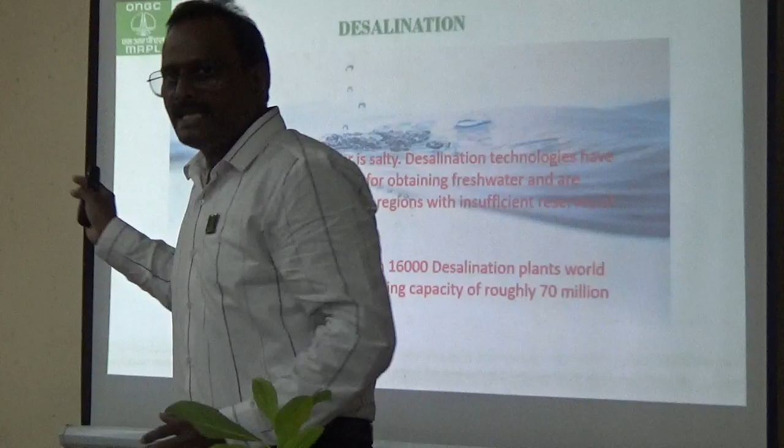Coming to this, 97% of the water throughout the globe is saline, salty water. So definitely, whatever freshwater resources we have are only 3 to 4%, that's it. The remaining, around 97%, is what we have throughout the globe. So what is the next alternative?

Up to now our eminent speakers have spoken many things, and I really learned a lot today from them. Earlier we were going with nature, but now due to urbanization and many other things, there is a small deviation from nature. So whatever freshwater resources we have may not be sufficient for our sustenance. That is the reason.

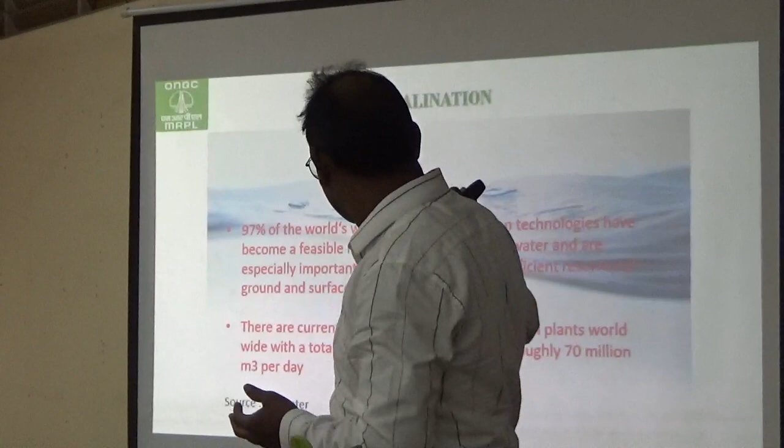Currently, throughout the globe, there are 16,000 desalination plants, really producing 70 million cubic meters per day. 1 cubic meter, as sir already said, is around 1000 liters. So this much saline water we are converting into fresh water for various purposes.

First of all, the source is raw water. The raw water sources are, one, sea water, and the other, brackish water. Brackish water means the salinity is lesser than sea water. So these are the sources for this.

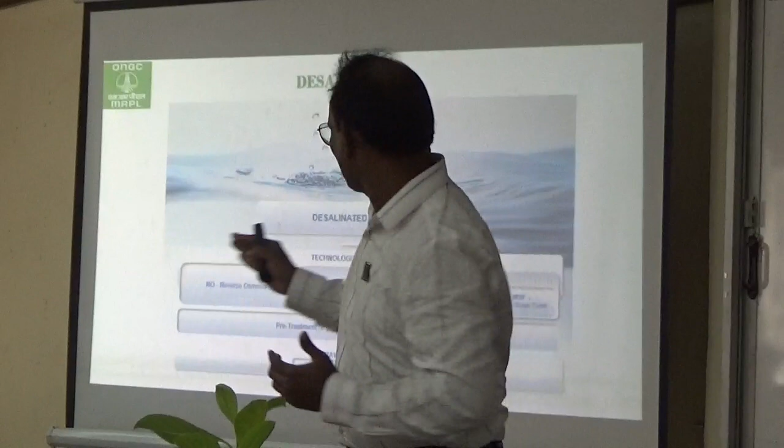Next, there are some technologies available. The major ones: one is reverse osmosis, and the second is MED, that is multi-effect distillation. In reverse osmosis, we give higher pressure to the molecule, breaking it so it cannot pass through, and the heavy molecules are broken and all the solids are brought out, converting it into fresh water.

This is the process used in reverse osmosis. Whereas for the other, thermal distillation technologies, we use steam and other things so that it evaporates, and from there we take fresh water out. All the salt deposits come down and we take that out. But that will be a bit costly, and handling the steam and other things will be a bit difficult.

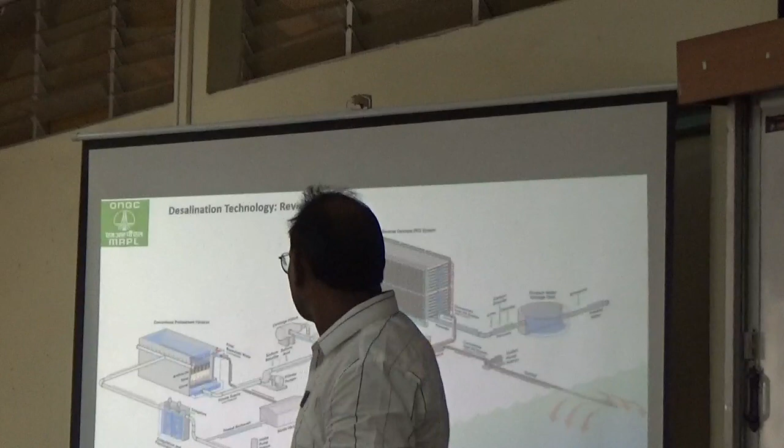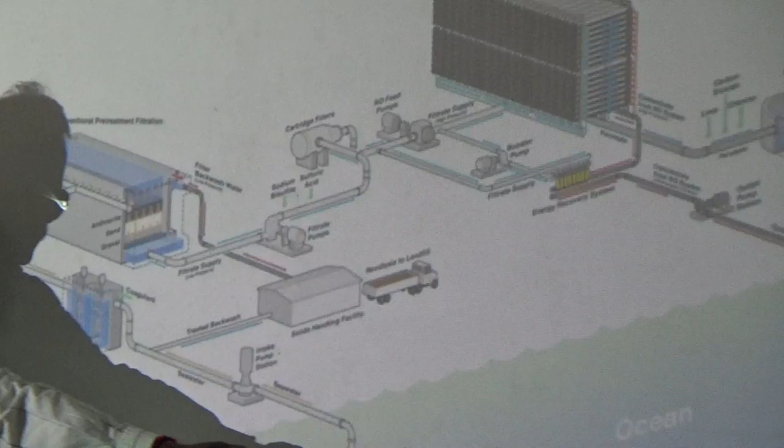Now, coming to the next one, how a desalination plant looks like. I am not hindering you, right? Is it visible? Yeah, visible. So now, if you look here, first of all, there is an intake. This is the point where I am taking the water from there.

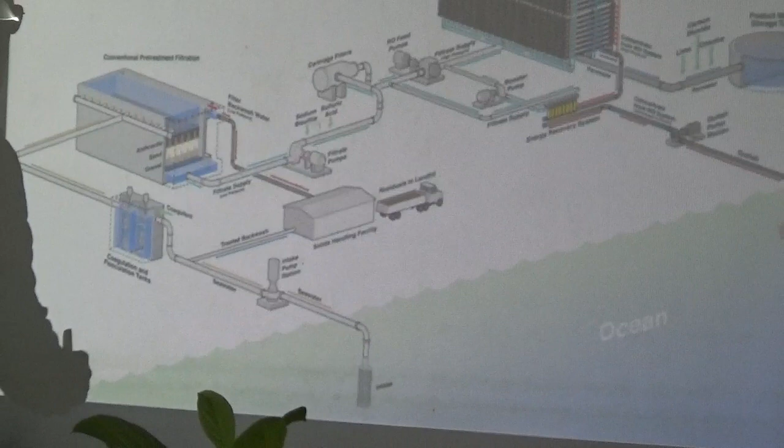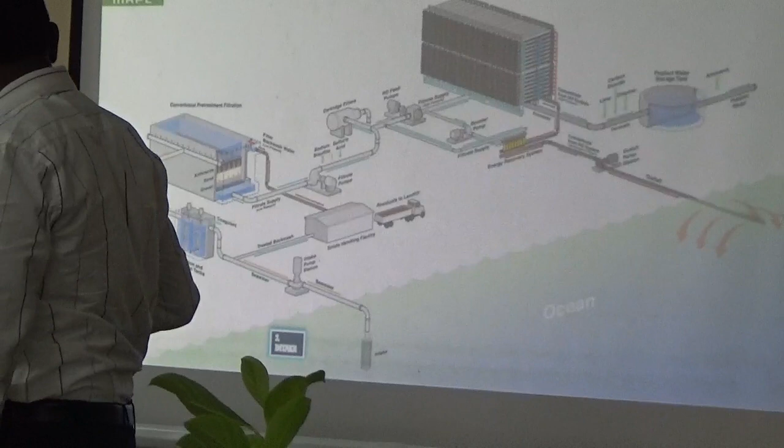From there, it goes here. This we call the pre-treatment section. Okay, this is the intake, then the pre-treatment section. From this one, yeah, I can use this pointer. Which one? The center one. Which is the point?

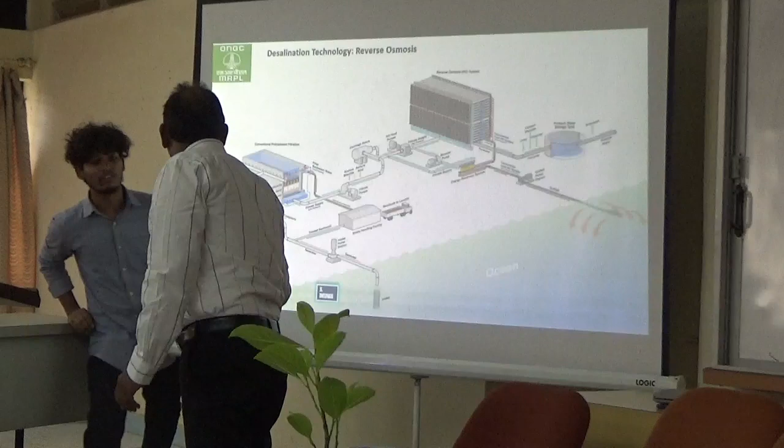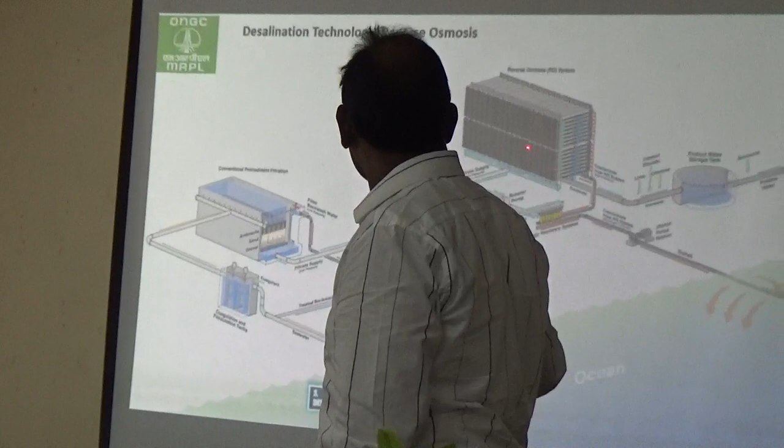This is the pre-treatment section, and after all this pre-treatment, then we go to the filtration method. From the filtration process, this is what goes to the reverse osmosis stage. And from here, the result and other things...

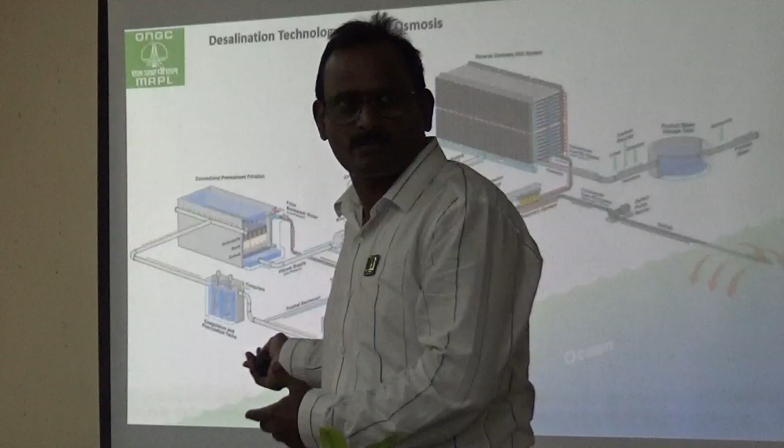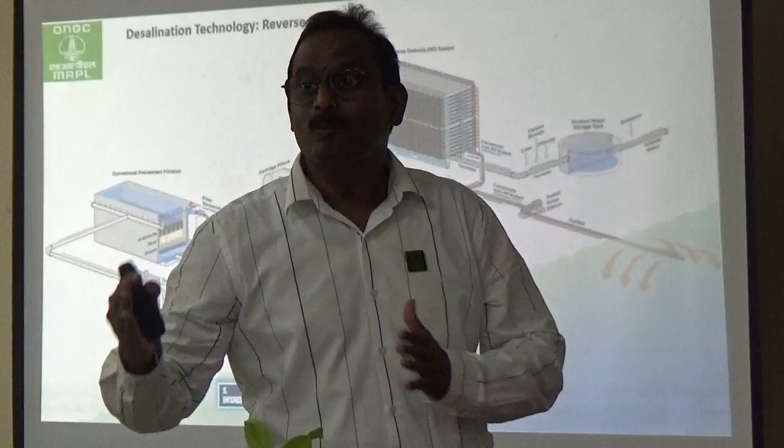When I come to our MRPL process, I will explain in detail. And then after the reverse osmosis, we can either go for potable water or industrial water. Potable water means drinking water. If you are going for potable water, you need to add carbon dioxide, calcium, chlorine and all, to convert this water into drinking water.

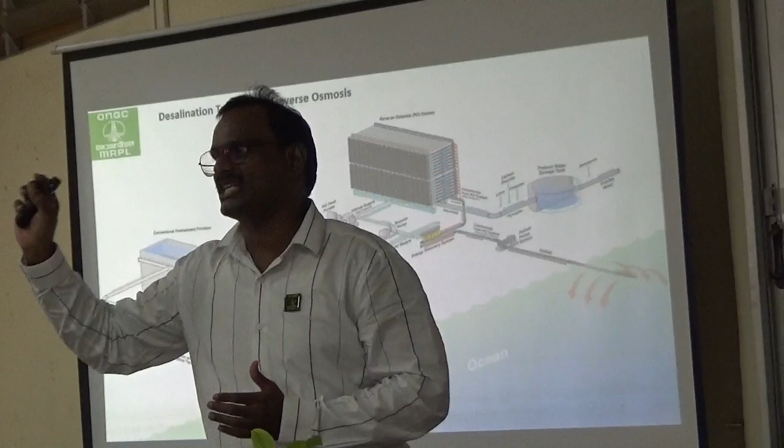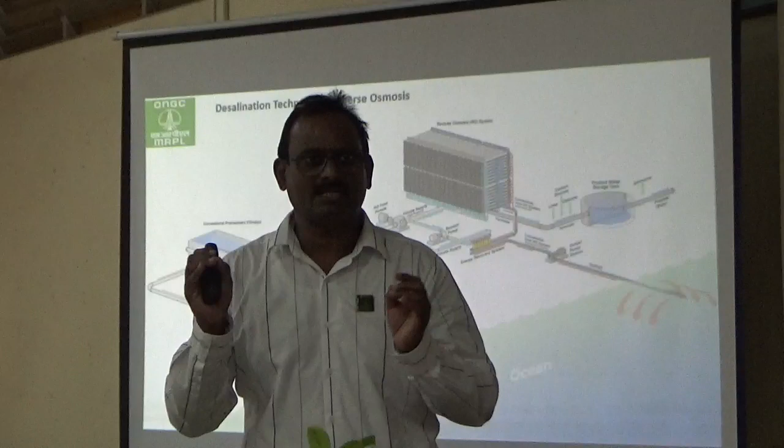Such plants we call remineralization plants. In MRPL facilities, we do not have any remineralization plant. Directly from this, we take it for industrial purposes. This we call industrial water. Clear?

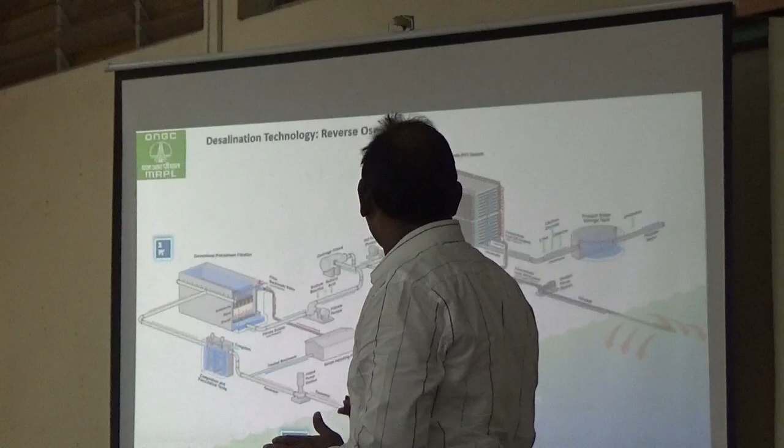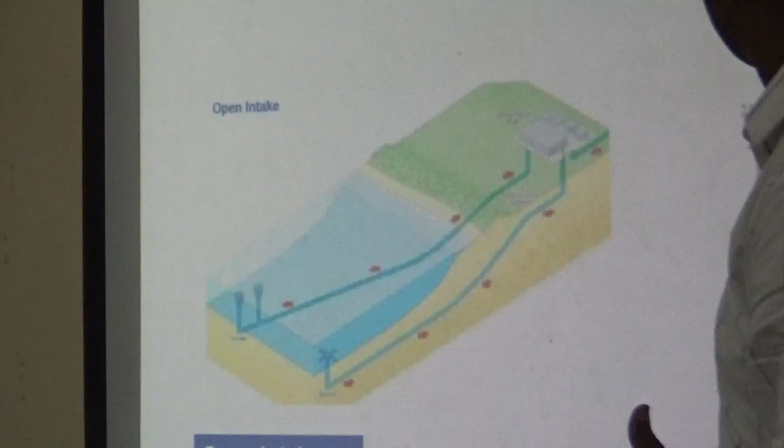Okay, these are the various sections. Next, how in that 1, 2, 3, 4, 5, what I have shown. In this one I am coming in. How we are taking water? There are two types: open intake, the first one, and the subsurface intake, the second one. The subsurface intake is used for small quantity, whereas for bigger, larger volume, we go for the open intake type. What we are using here is the open intake type.

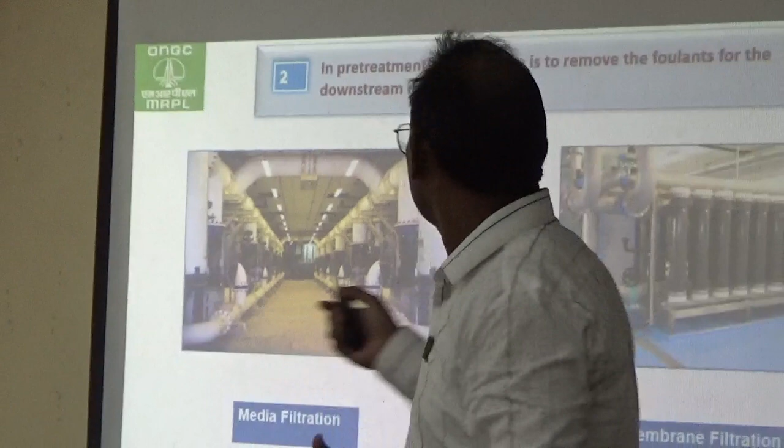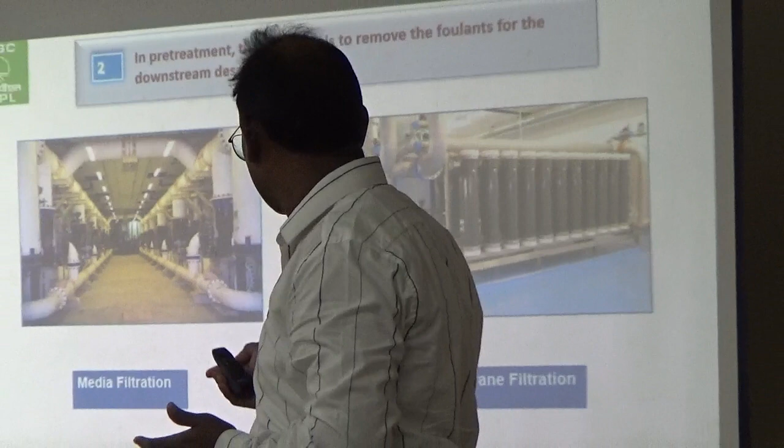Next, the second section is the pre-treatment section. Whatever dirt, heavy solids, all these particles, we need to segregate from that. From there we have two systems: first is media filtration, and second is membrane filtration. Next, going to that one, then...

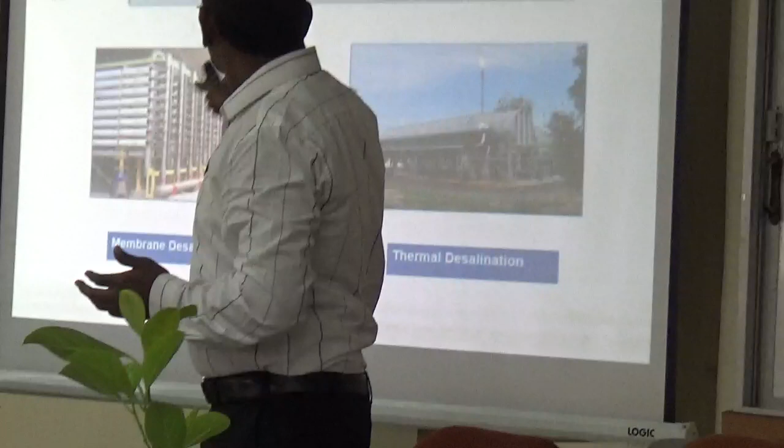In the membrane filtration, what we are doing is desalination - all the dissolved solids we are removing. The other method is thermal desalination, but we are only going over the first one called membrane desalination.

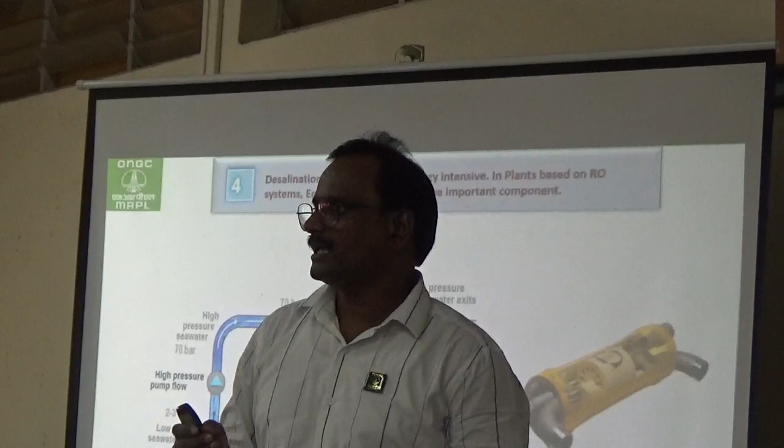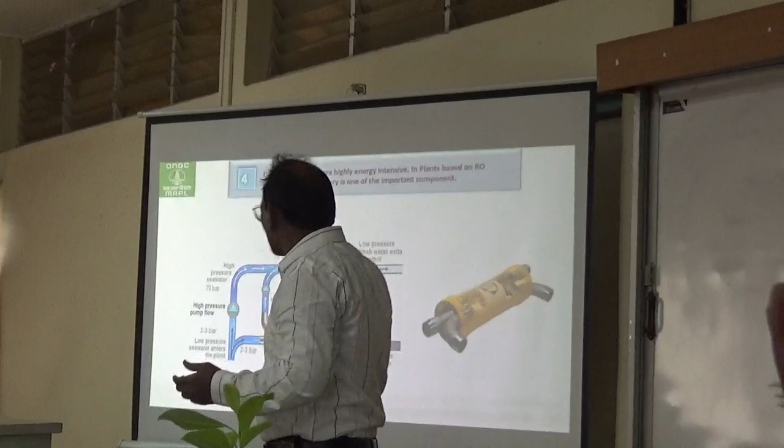Next, here in this one, our speaker I think Murallee sir has told, energy is required and other things. In this there are energy recovering devices, because for this reverse osmosis process we need more energy - up to some 70 bar pressure we need. So for that, we are using energy recovering devices.

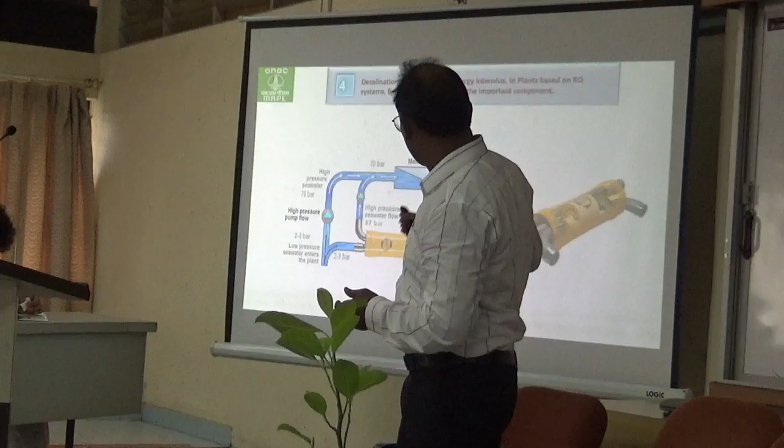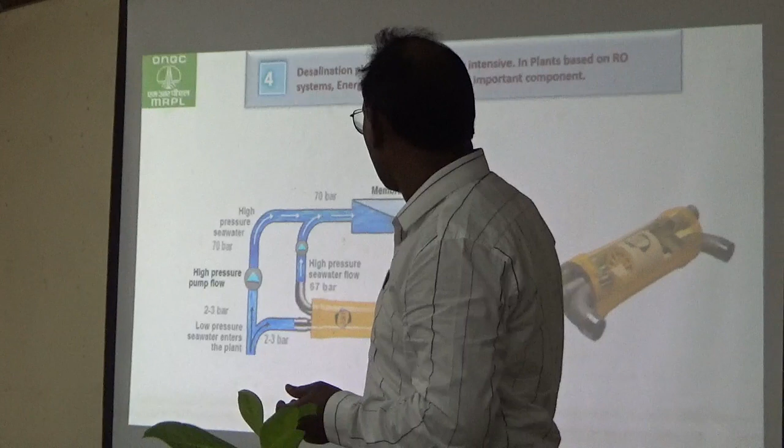By using this - whatever, first of all the seawater is coming, the seawater is a low pressure one. We are using a high pressure pump here. Using this high pressure pump we are putting it here and taking out. And when we are going outside of this, the low pressure water will go this side, and again this high pressure seawater stream will be there.

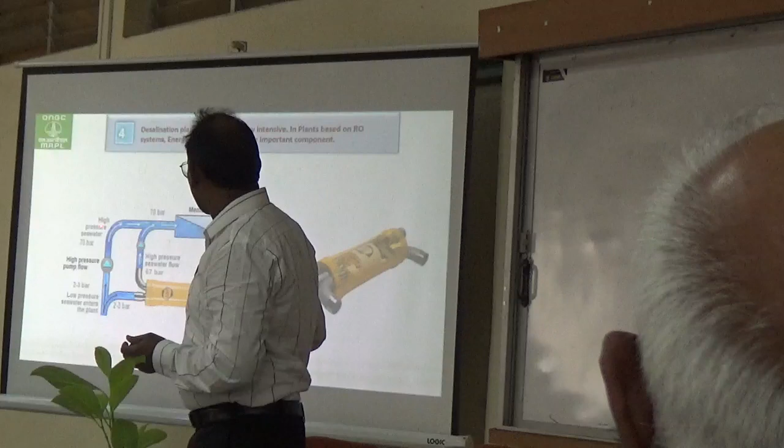Again we are using this energy recovering device, putting it here, so that with less support - here I need 70 bar, here almost 67 bar I have recovered. That means only 3 bar pressure energy if I can give, I am going to get it in this one.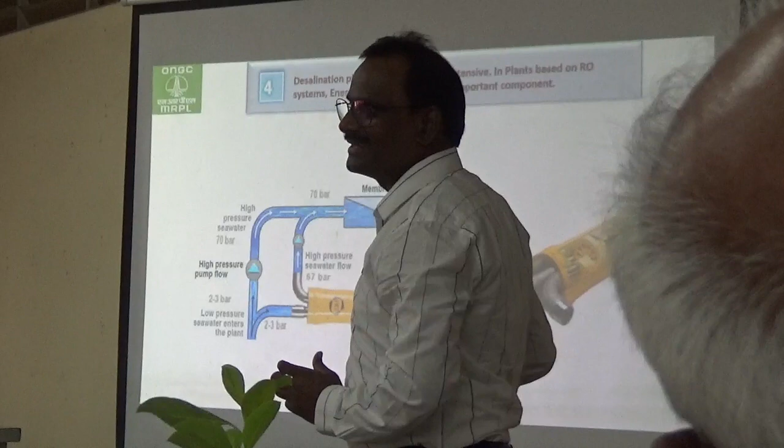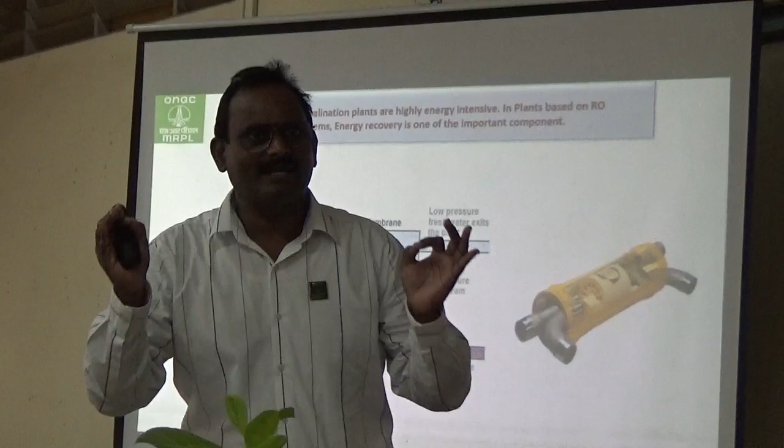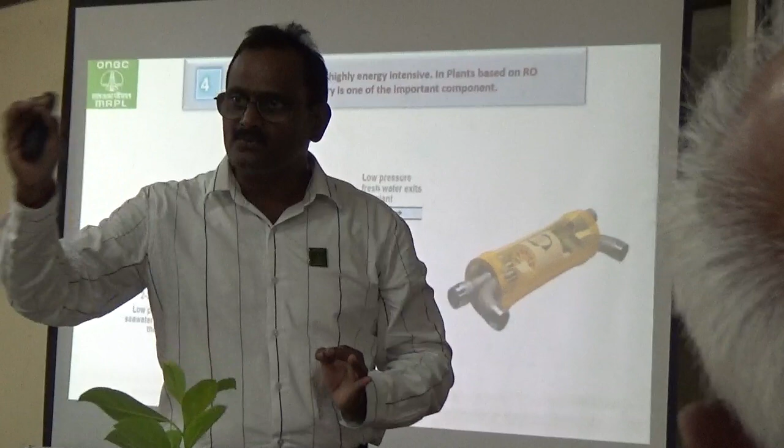Sir, in this reverse osmosis methodology, what we are adapting at MRPL, our recovery rate is around 45%. That means, suppose if 100 liters of desalination water we are taking, out of that 100 liters, 45 liters can be converted into fresh water. That's why we call it recovery. But overall, accounting for the other losses in the plant, our desalination recovery is up to 38% to 39%. That means around 100 liters of seawater we are taking, and we are able to get around 39 liters of fresh water.

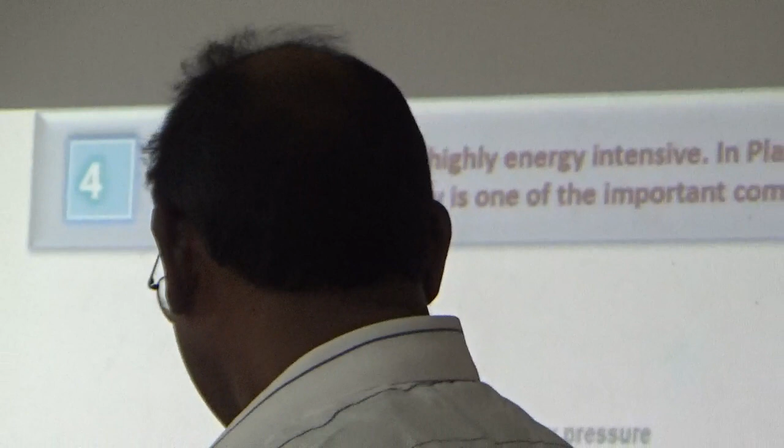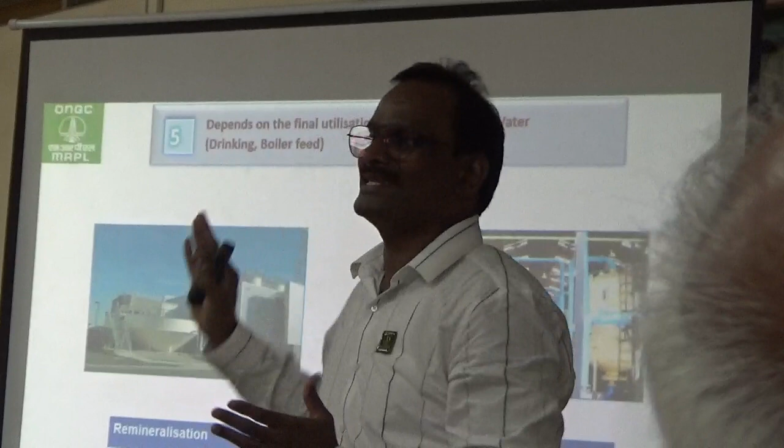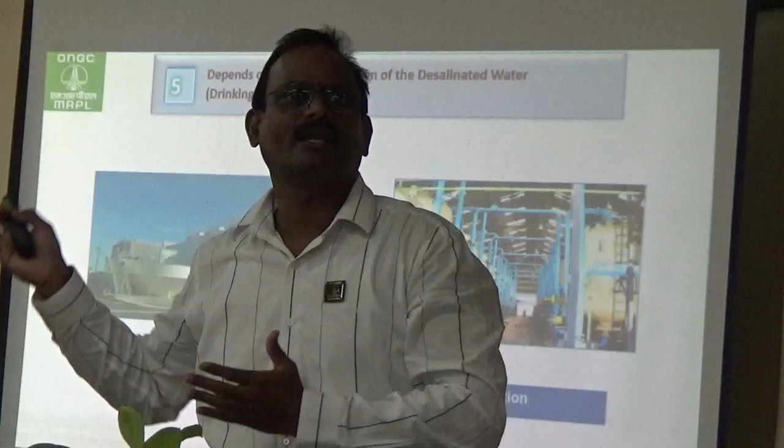And next, this is the section I told you we have not installed, because our requirement is for industrial purpose. If you see here, there are two things: if this desalination water is wanted for boiler purpose, we can use a demineralization plant - we call it a DM plant. Suppose if you are using it for drinking purpose, you have to use remineralization - there we are adding carbon dioxide, lime, milk of lime, chlorine, to convert this to drinkable water, the potable water. But this particular installation we have not installed at MRPL, because we are not using the desalination for drinking water - our limitation is we want to use it only for production of industrial purpose processing.

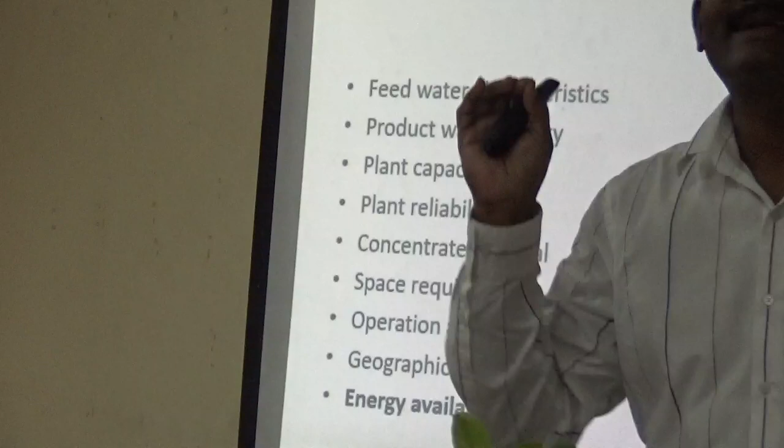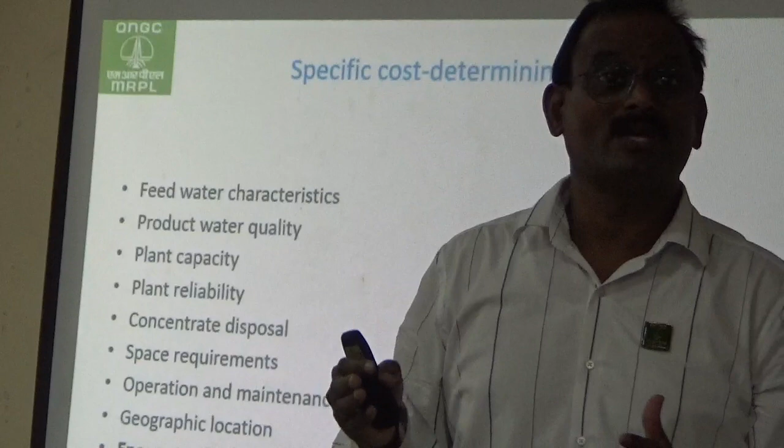Now sir, what are the key factors required for the performance and specific cost determining factors? One is the feed water characteristics. It depends upon the area of sea where you have selected - if the seawater content has algae and other problems, then your cost will go up, because all the chemical dosing and other things will increase. So that is the reason feed water characteristics is more important.

Next, the product water quality - what kind of product water quality you are expecting, whether you want industrial water or potable water, depending upon that the product water quality changes. And then plant capacity - what plant capacity you are putting up.

We are in MRPL refinery, using the desalination plant of 40 MLD capacity. That means 40 million liters per day. Converting to the general unit, that's 8.8 MGD, million gallons per day. This is the conversion for the production we are doing right now.

Next is plant reliability, meaning how often the plant is able to produce. If you keep setting up a desalination plant but it's not performing properly, the reliability of the plant and the reliability of the technology are also very important.

Next is concentrate disposal. Say I am taking 100 liters of water and producing fresh water of around 40 liters per hour. Then the remaining 60 liters, what do I do? I have to put it into the outfall.

But when putting it into the outfall, I have to take care of all the environmental norms. The disposal should be such that the salinity conditions and the biomechanism of all the water bodies and water animals can survive. I have to put it back properly so all this is sustained. Unless I do that, I will not get environmental clearance to run this plant. This also incurs cost.

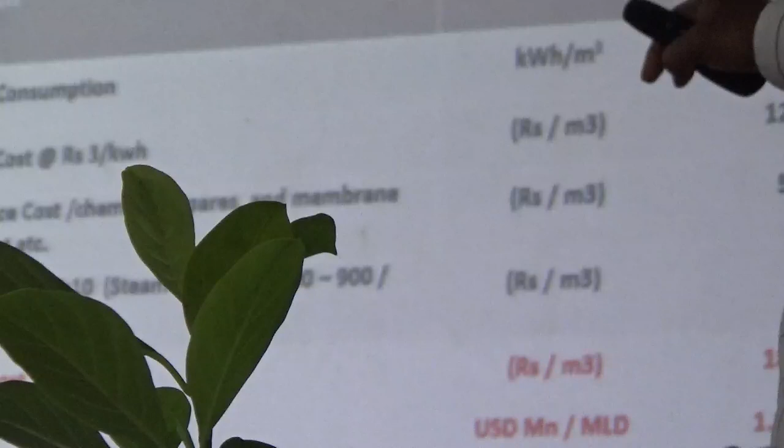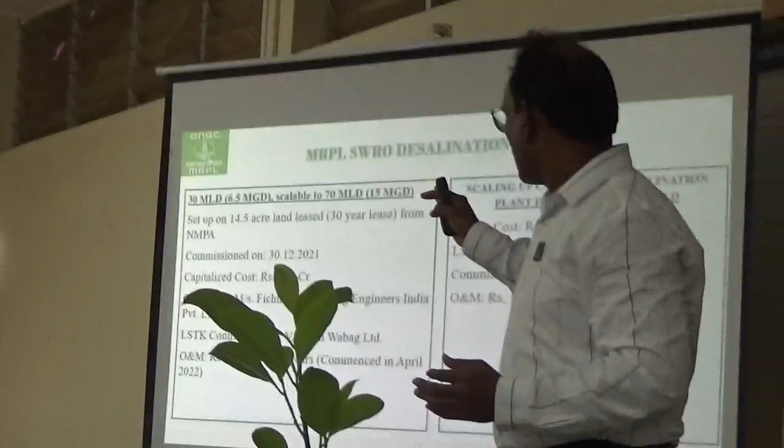Coming to our desalination plant, this project was commissioned in December 2021, sir. The capitalized cost is around 677 crores, for 30 MLD. For the 30 MLD, this is my capitalized cost.

That plant was constructed by consultant Fichtner Consulting Engineers, if somebody wants they can consult them. And the LSTK contractor who has done this is Messrs VA Tech Wabag, this was located in Chennai at Manali. They have made 100 MLD, 150 MLD desalination plants. In Peru, they are going to construct a 400 MLD desalination plant. VA Tech Wabag is the contractor executing that job.

30 MLD is not sufficient to us, so our management will take a call. We were given a task: within 7 months, give another 10 more MLD, that means 2.2 MGD to sustain. For that I spend around another 54 crores, because before when constructing the 30 MLD plant, that was made with availability for expansion up to 70 MLD. That is the reason within a short span, all the civil structures are available with me, everything is available. Only the trains and other things I have to put in and bring up the plant.

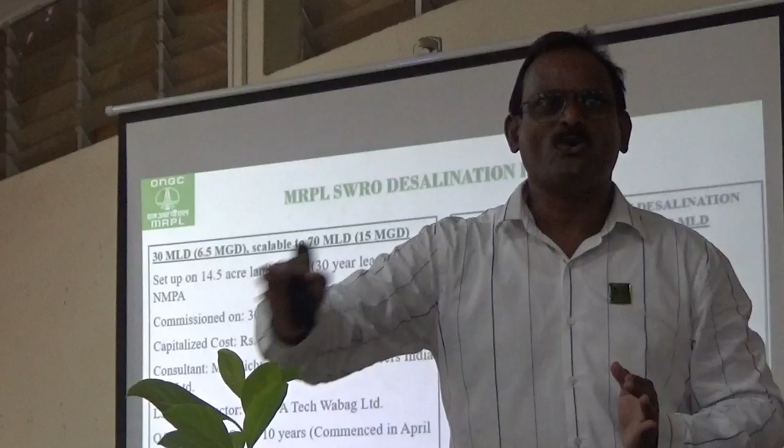So it will be another 54 crores, now around 730 crores. We have a desalination plant of around 40 MLD in MRPL. From last March onwards, this 40 MLD is running, so due to this we are able to sustain our refinery production. For drinking purpose, we are getting 3 MGD water from fresh water for the drinking water facilities, we are able to make it. Another thing, we have our own effluent treatment plant, recycle water also, we are using it to sustain the refinery process requirements.

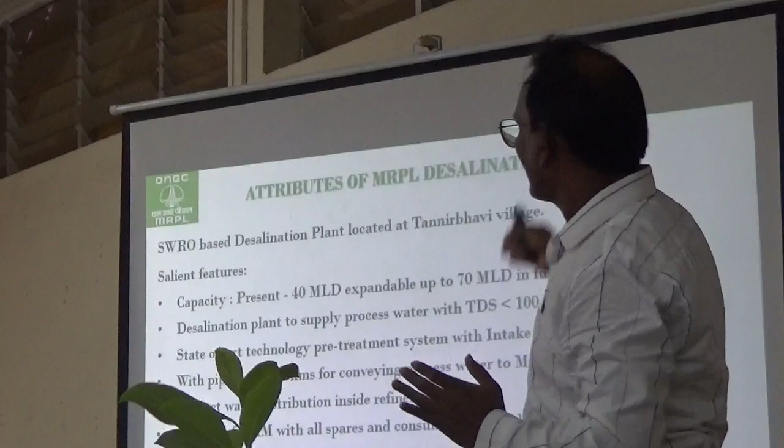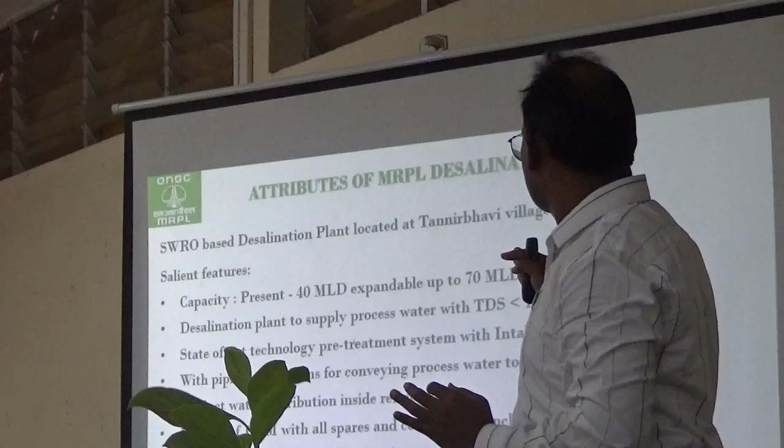What are the attributes of MRPL desalination plant? Capacity 40 MLD, further expandable up to 70 MLD. Desalination plant supplies process water with TDS less than 100. For drinking water TDS, it will be around 100 to 150.

State-of-the-art technology, pre-treatment system, intake, outflow system, what we have. With a pipeline, the product water to the refinery from Tannirbhavi, we are pushing it around 10 kilometers pipeline we have, sir. We are pumping that water to the refinery. Product distribution inside the refinery also, we have a distribution network of around 10 kilometers inside the refinery. And we have given operation and maintenance to the same WABAG team to maintain this plant.

For this, I am spending 120 crores for 10 years for 30 MLD, another around 17 crores. That means altogether around 130, 140 crores I am spending for running this refinery desal plant. For the next 8 more years, this can be maintained by Wabag, for that I am paying.

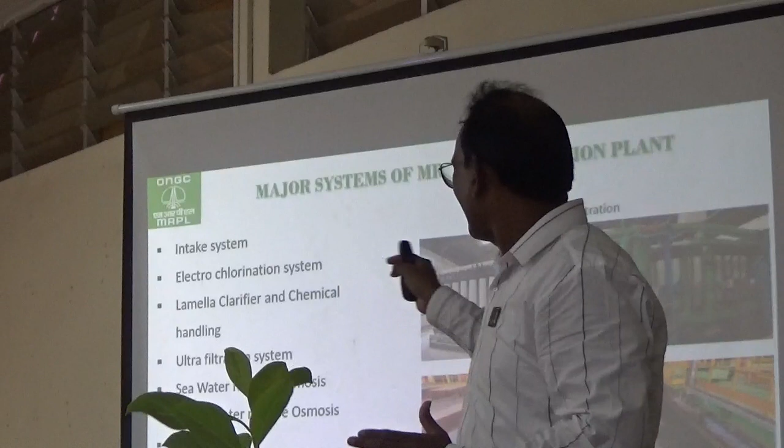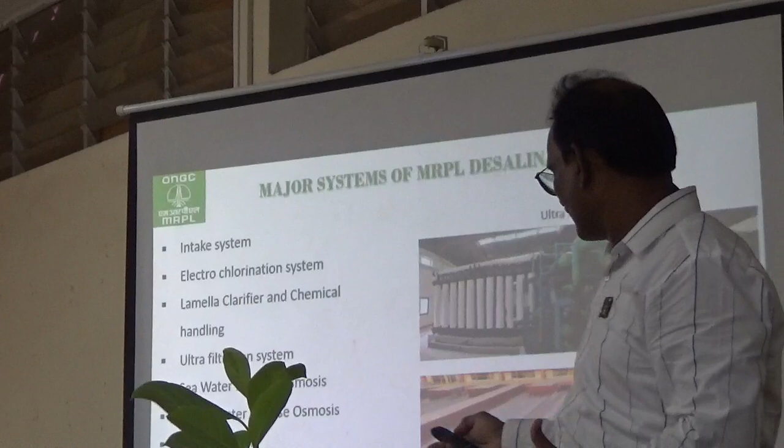Next, how it looks, ultrafiltration. These are the various systems we have in our desalination: one is the intake system, electrochlorination, lamella clarifier, handling ultrafiltration, seawater, then brackish water, outfall, product water. Ultrafiltration looks like this, and this is a lamella clarifier. Some pictures for clarity so you can understand how it looks.

And this is our seawater reverse osmosis. The membranes, pressure vessels, it looks like this. The pressure tube, what I told you, the pressure exchanger, that one. These are the pumps and other things for reverse osmosis. This is the backwater, brackish water osmosis, we have brackish water also. And then we have, see, that is the equipment.

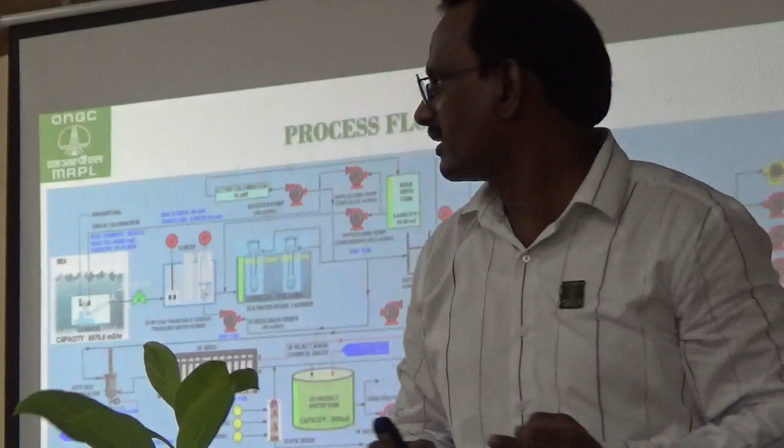Now, how we are producing desalination water into fresh water. I have time, right, gentlemen? Yes, sir. Thank you.

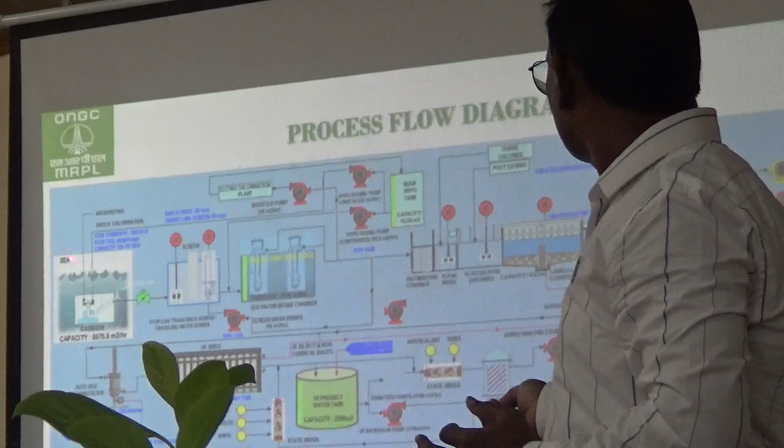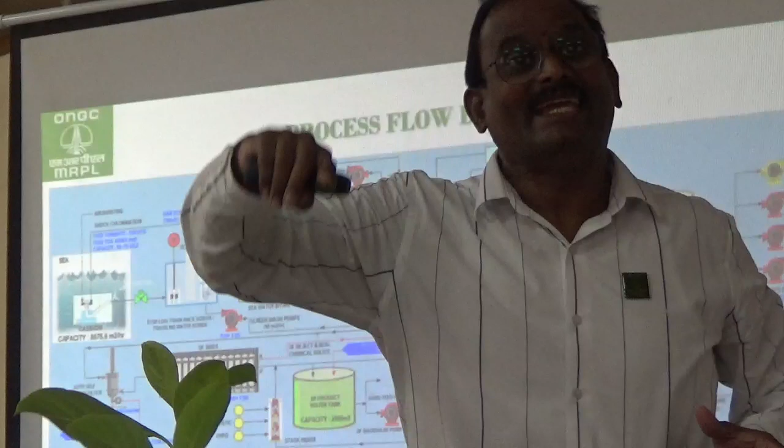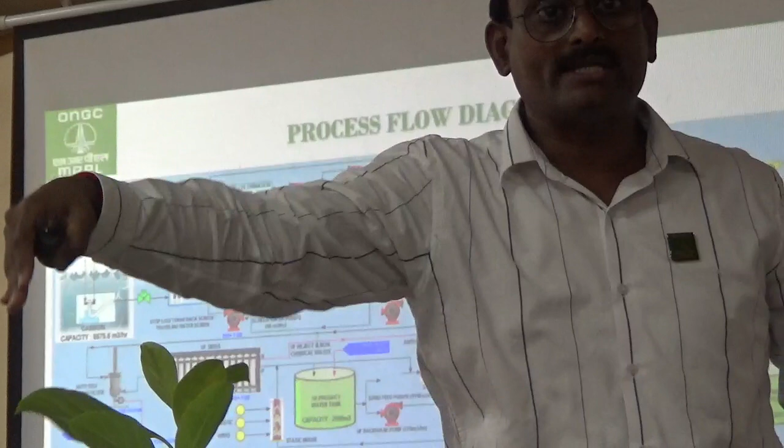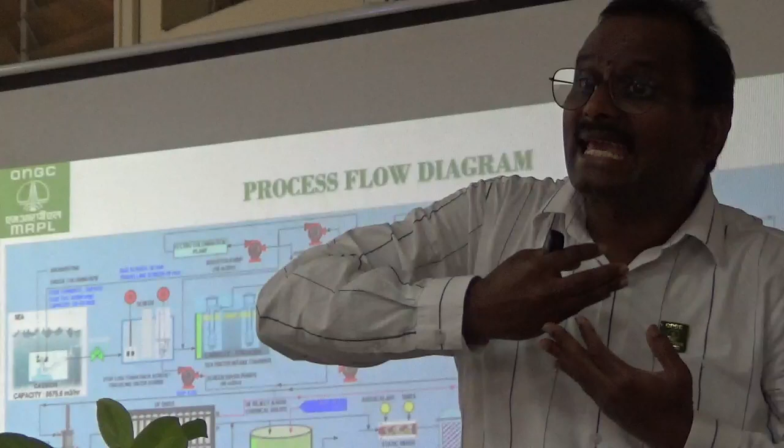Coming to the first part, this is the intake way. From our facility to the sea, we lay a 10 kilometer pipeline into the sea, sir. There is an HDPE pipeline, it's a size of around 44-inch pipeline, and depth of that one, 7.7 to 8 meters depth we have kept inside. The water comes out with gravity. We call it a caisson, which holds there to keep that one. It has a full mesh and other things to avoid jellyfish and all. Here we are not applying much pressure, so that even if fish come out, it can sail back and go out, there is no harm for the marine bodies.

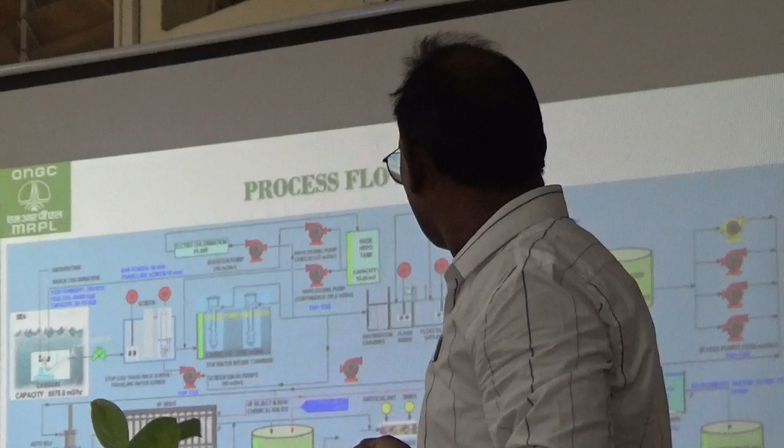After that, the seawater comes to the seawater bay, this is the seawater bay. After that, we have two streams: one is the trash rack screen and traveling water screens.

All dirt particles and other impurities will be removed. From there, we are putting this water into an intake chamber, and we have pumps to pump that water forward.

Next is the lamellar clarifier. Here, all the silt and other materials will be deposited at the bottom, and from there we are getting the clarified water.

The interesting factor you have to understand is the seawater TDS, total dissolved solids in the seawater. It is around 40,000 in the Arabian Sea, around 40 to 45,000 mg per liter. This is the seawater salinity.

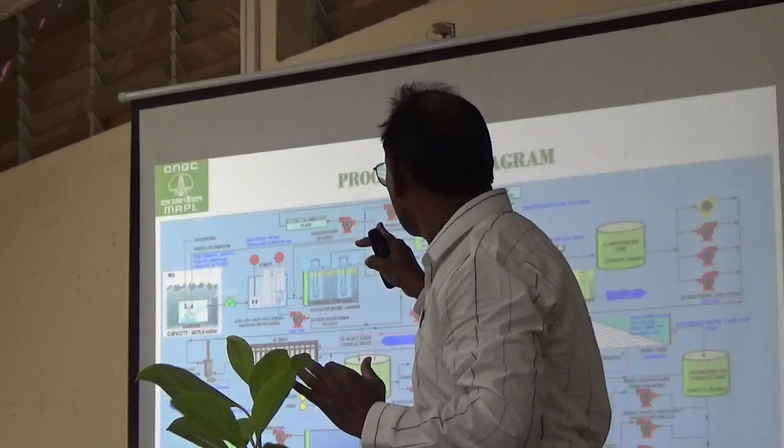That is what we call turbidity. The TDS is around 40,000, and the turbidity is around 500 NTU. This is all after the pre-treatment.

There is one more pre-treatment section, the ultrafiltration. Here the total water will be ultra-filtered, and all the fine particles will be removed, except the dissolved TDS, which will be maintained as is.

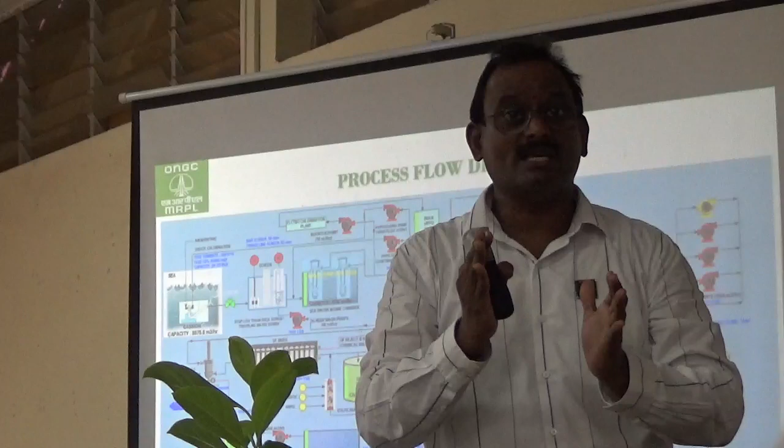From there, the water comes to my SWRO. The beauty of this SWRO system is we have a total of 4 trains, each with a capacity of around 10 MLD. In each train, we have 114 pressure vessels, and each vessel consists of around 7 membranes, meaning almost 798 membranes per train.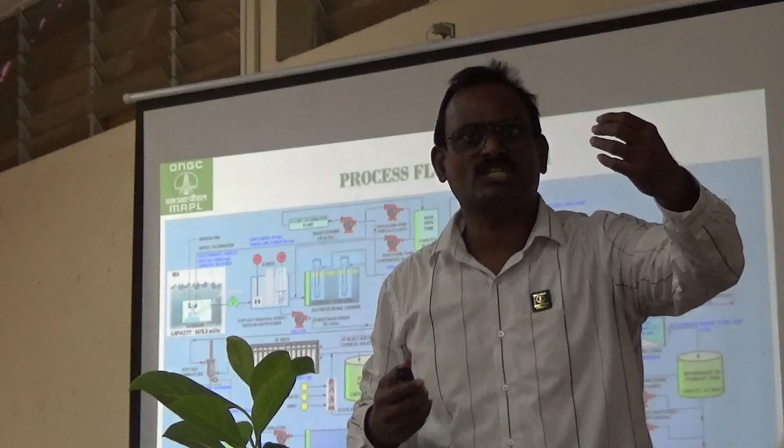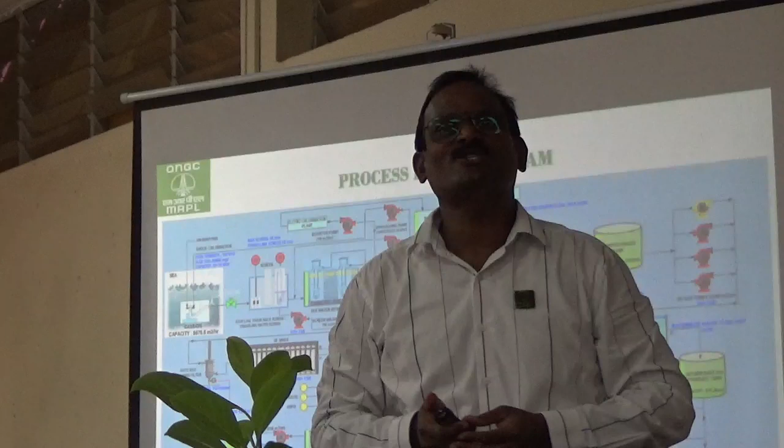From one side I give high pressure, which breaks the molecule, and all the dissolved salts fall down. The fresh water comes out from the outlet. The TDS here, where it was 40,000, is reduced to 350 at the outlet.

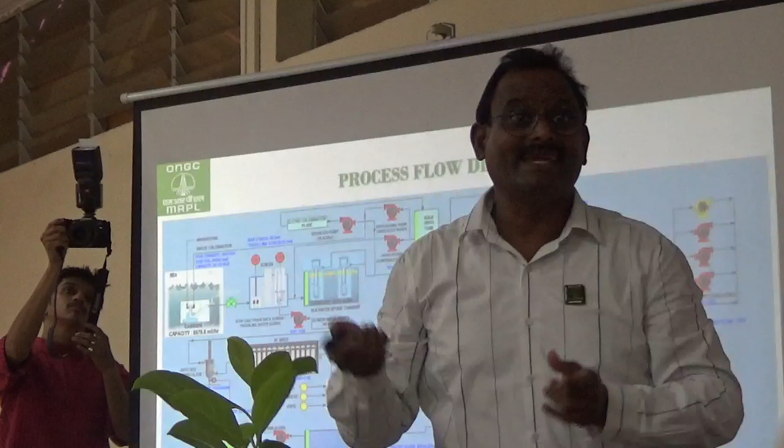From this one, we again put the water through one more osmosis process called brackish water reverse osmosis, BWRO. Here also, it passes through membranes and systems, and the TDS, which was 350, is reduced to 20.

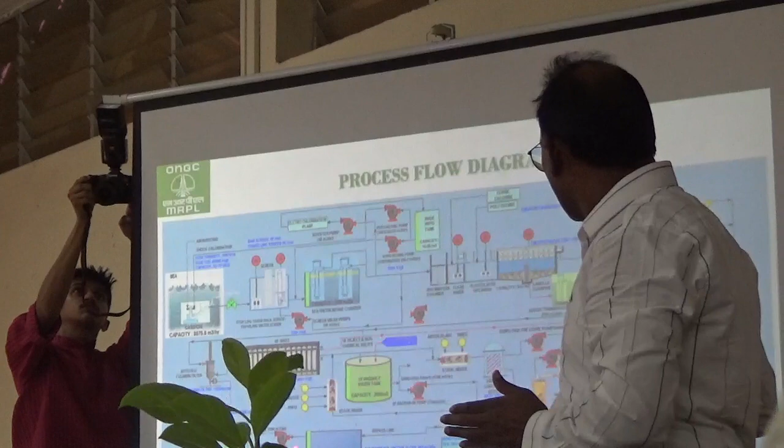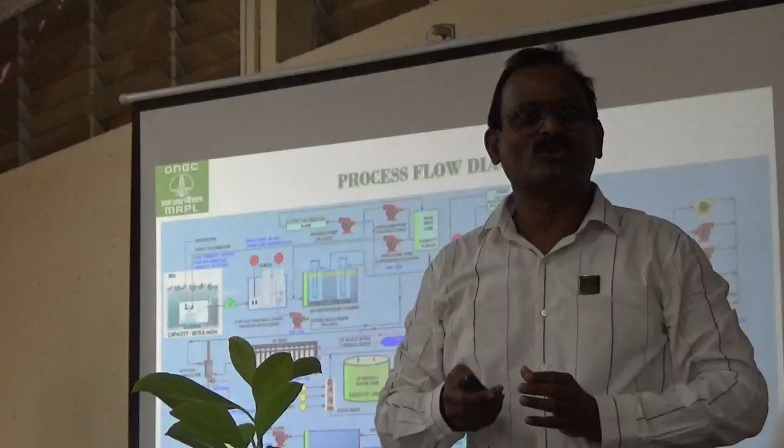Finally we blend some water, and whatever the TDS we send to the refinery, we use product water pumps to tanks at the refinery. We put the water into these tanks, and from there we distribute it to the refinery.

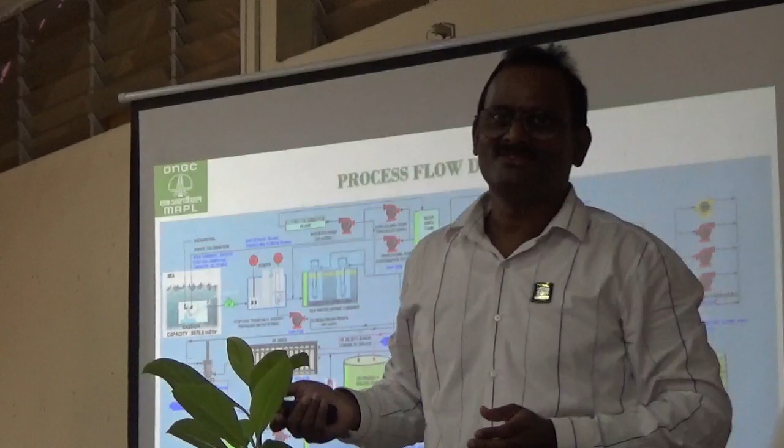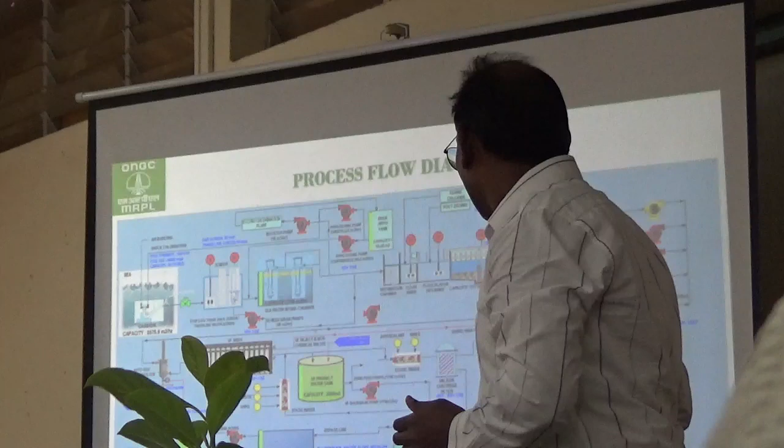Whatever reject water remains, which will have more salinity than what we took in, we use a diffuser to diffuse the salinity back to match the seawater. This maintains the water bodies so that fish and other marine animals can sustain, and then we put it back using the diffusers.

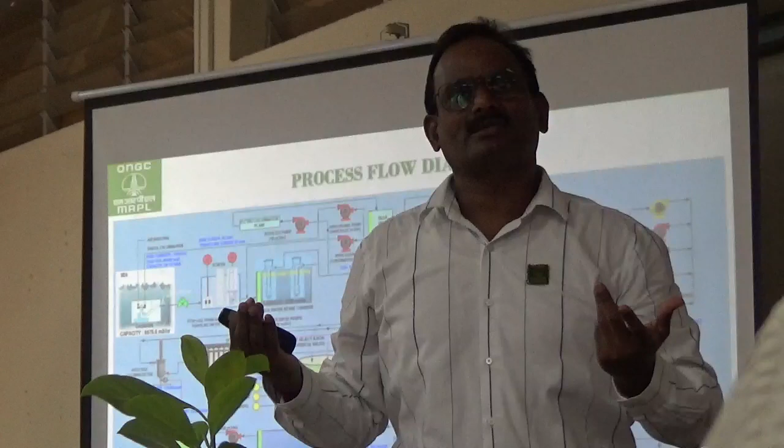So friends, it is a process we can do, it's not a difficult thing. The main point is, as sir has told, we have to go with nature, that is the important thing.

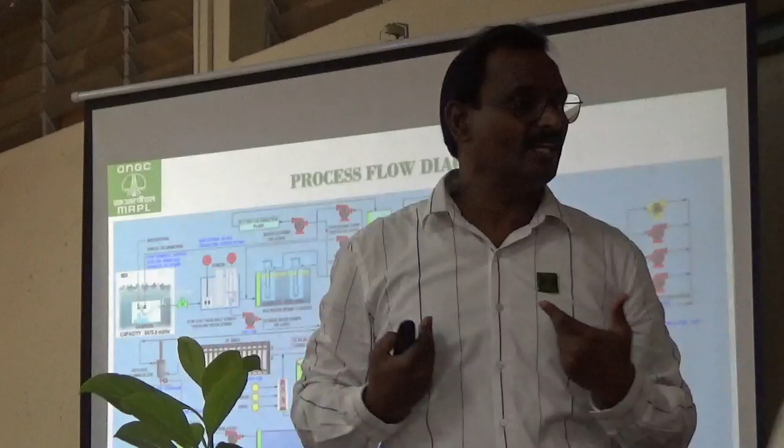I have been using this plant since 2021. For the last two to three years, my refinery has sustained well. With this, I have refined at 100%, even 110%. My refinery capacity is 15 million metric tons, and we have refined 17 million metric tons.

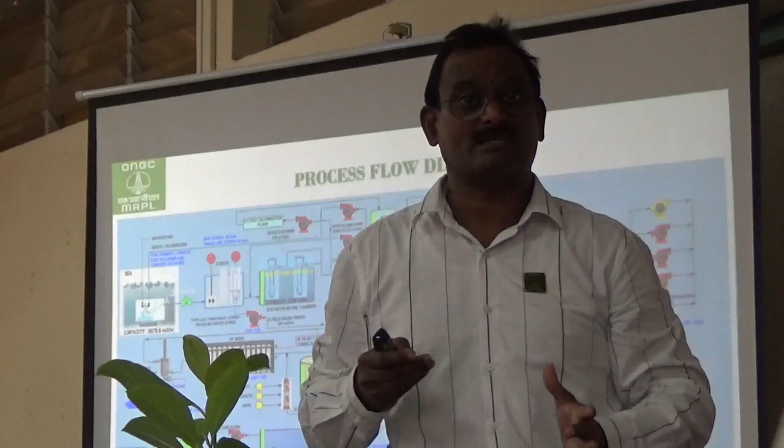This year also, since March we have faced a crisis like everyone else, but my refinery is running at full throughput with absolutely no problem, thanks to this desalination plant.

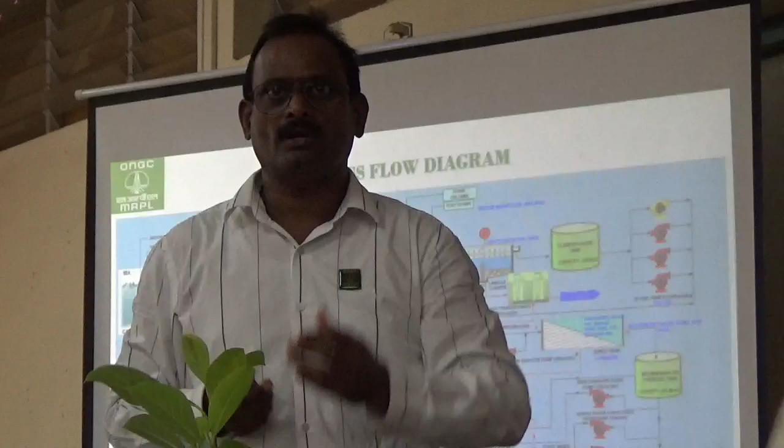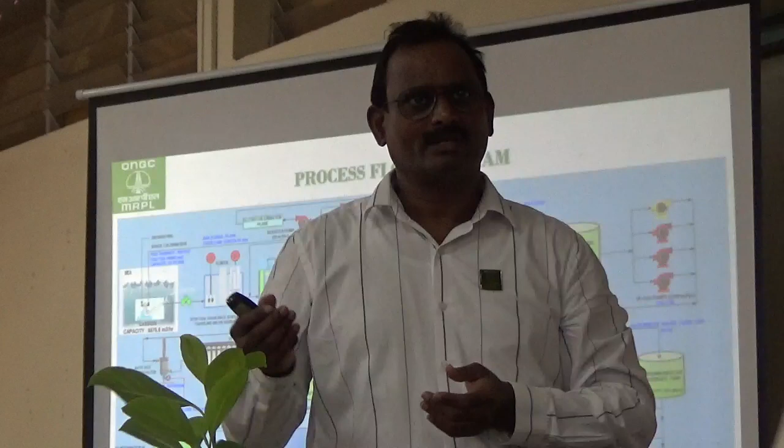Someone may ask what the freshwater cost is for us. It may be around 6-7 rupees per cubic meter. But for desalination water, since I am not using remineralization, my cost may be around 45 rupees per cubic meter. I use this water because my downtime is more costly than the investment I have put in here, so that is the reason we have gone for this.